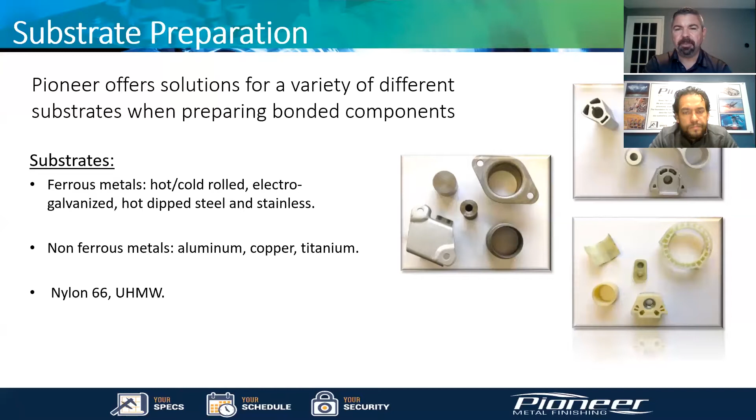So let's move on to the next slide, which really breaks down the chemical as well as the mechanical processes for each of these, and we can talk about when each one is used for what type of material.

Substrate preparation is basically preparing the surface for the coating we are going to apply. In this case, we are focusing on bonding systems for rubber to metal. So what we're trying to do is create a good surface, a good environment for the primer to stick to the surface and perform the way it's supposed to perform.

Right now, we usually have two different ways of preparing the surface. One is chemical, which consists of different chemicals that will prepare the surface and modify the structure of that surface during the process. And obviously the mechanical, which will be more of an abrasive type of preparation.

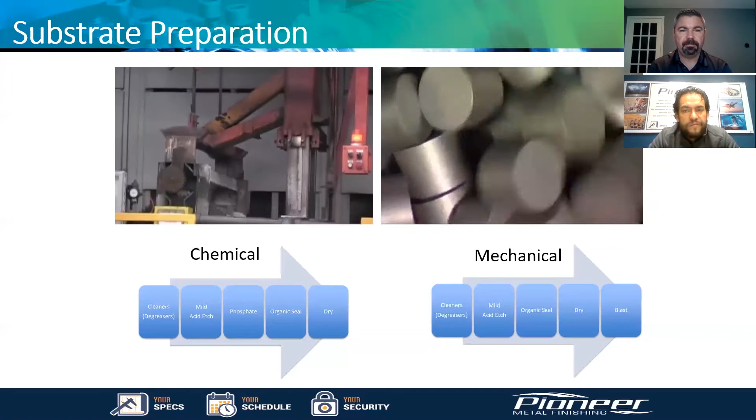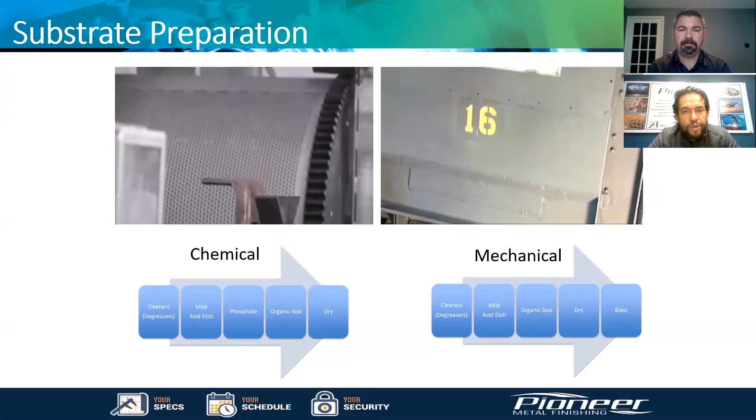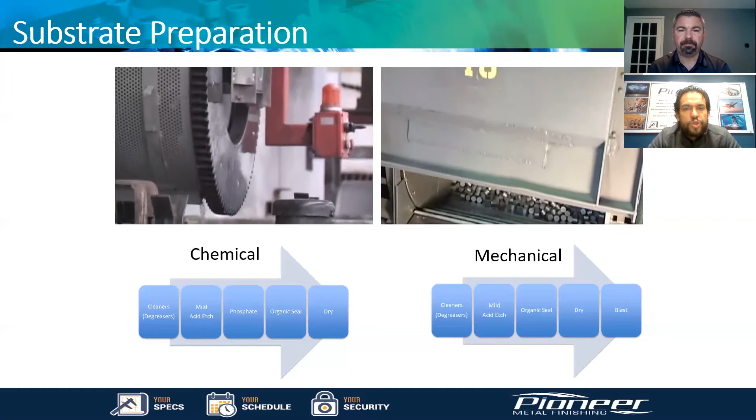So we want to focus on the chemical. Usually everything starts with cleaning the surface. Most of the surfaces or parts we receive are coming from stampers, tube cutters, or overseas for a long period of time, and they have some type of rust inhibitor. So what we need to do is make sure we clean that surface perfectly with degreasers, and after that they go through a mild etch just to prepare the surface as we're going to apply a phosphate layer on top. So what the acid etch is going to do is create some micro holes in the structure so we can deposit the phosphate crystals in there.

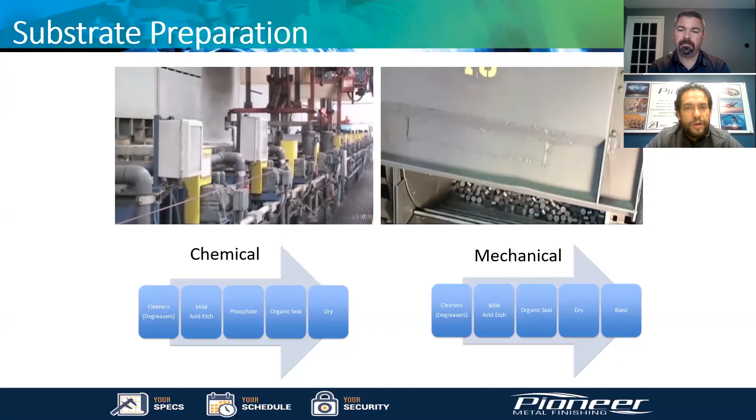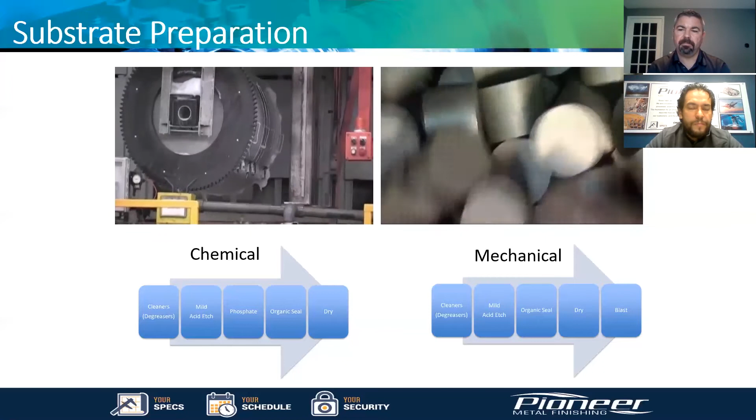Phosphate will be one of our best substrate preparations and the most common for parts, steel parts basically. After that we can do two things: we can put on an organic seal, which is a very mild seal. In some cases customers don't like that, so we leave the surface as it is. But we need to make sure the parts are coated fast, 24 to 48 hours later, or they will start to rust, especially if there's humidity in the environment, depending on rainy season and all that stuff. You need to take that into consideration.

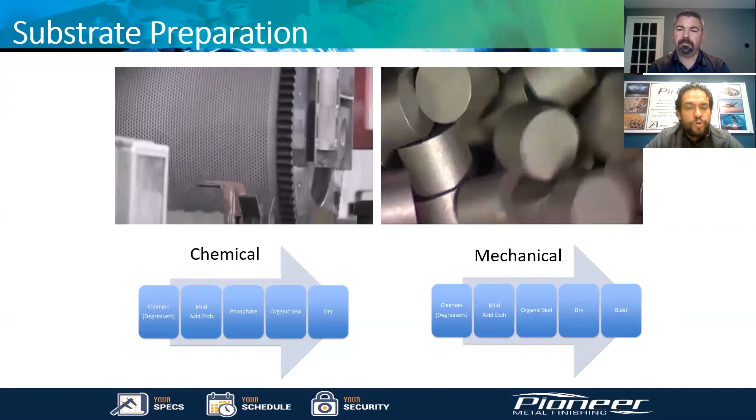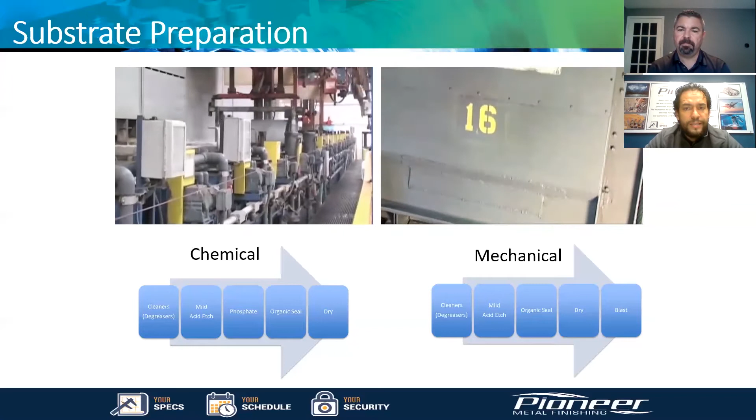If you choose to use the organic seal, that will definitely help you in those conditions. After that, you just need to make sure it's completely dry, and then you move it to the next process. So basically that's what the chemical process flow looks like. It's pretty straightforward, everything is done in one same line with different barrels, similar to the video on top of it.

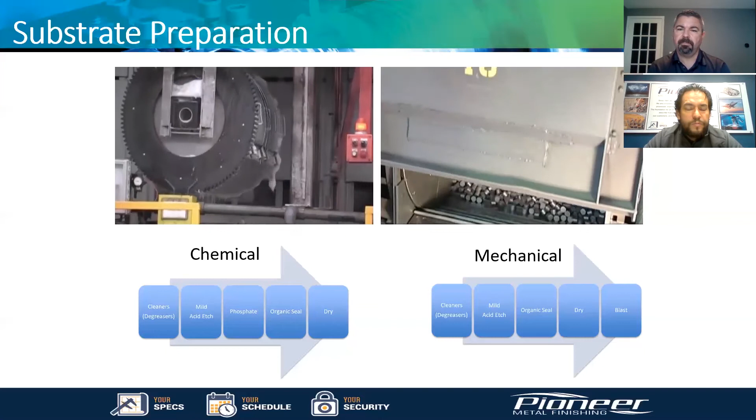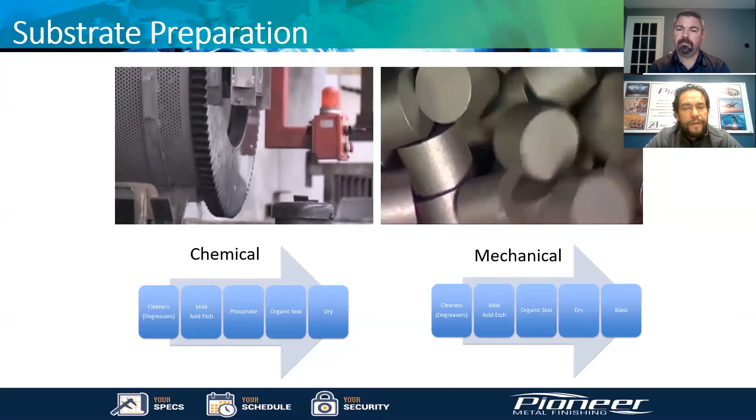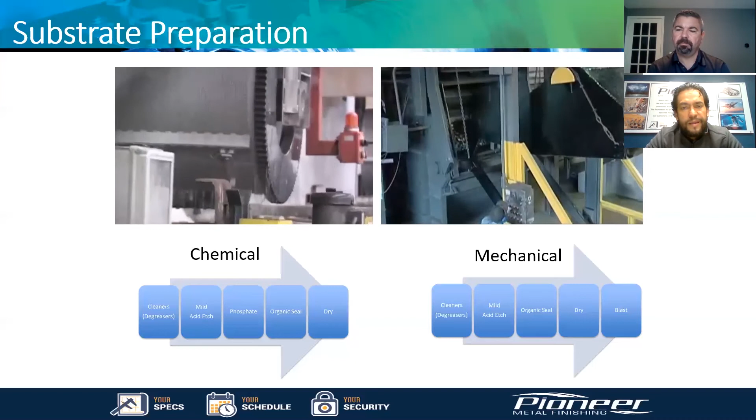For the mechanical process, it's obviously an abrasive cleaning of the surface, but again, just to avoid contamination on our blasting systems, we degrease everything prior to blasting. So we start with degreasing only, a mild etch as well, and then we apply the blasting. Usually what we're looking for here is to create roughness on the part, and that roughness creates a lot of contact points that will allow you to apply the primer and the adhesive, and will bond to the surface.

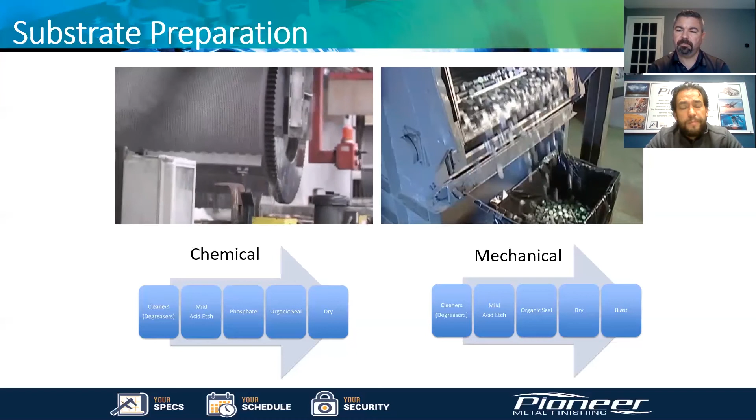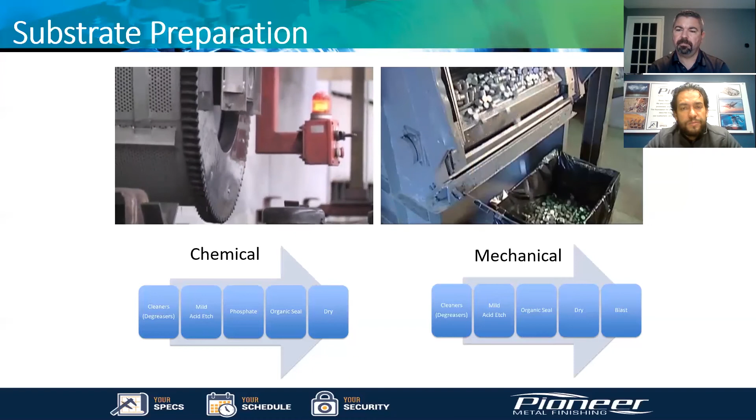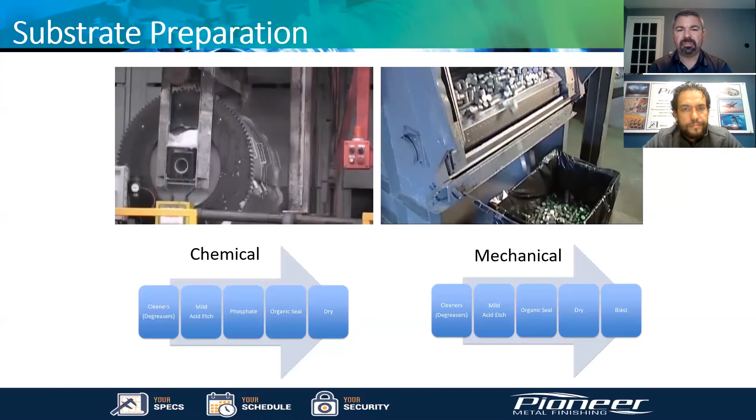Most of the aluminum parts use mechanical cleaning, or mechanical preparation sorry, and that's what we also do for some of the plastics we receive. In some other cases we also have a special aluminum wash, but it's followed by a blasting operation. So really what we're trying to do here is increase the surface area for preparation and adhesion of the bonding material.

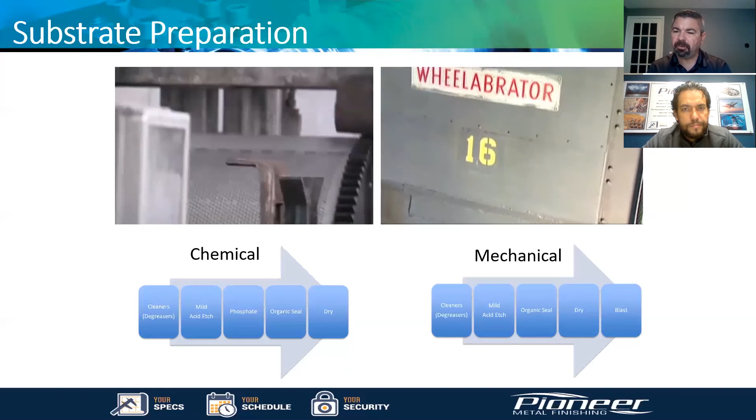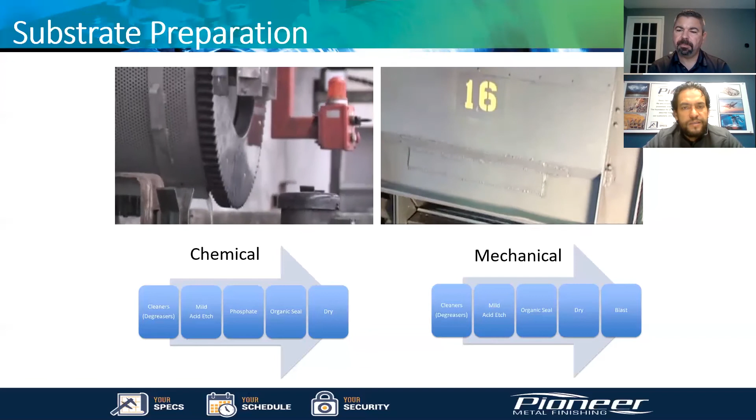Whether that be the primer or even in some cases the adhesive directly to the part, right Pablo? Yeah, you couldn't say it better. That's basically what both processes are looking for: increase the contact surface that we're going to have by creating these peaks and valleys in order for the primer to attach to the surface.